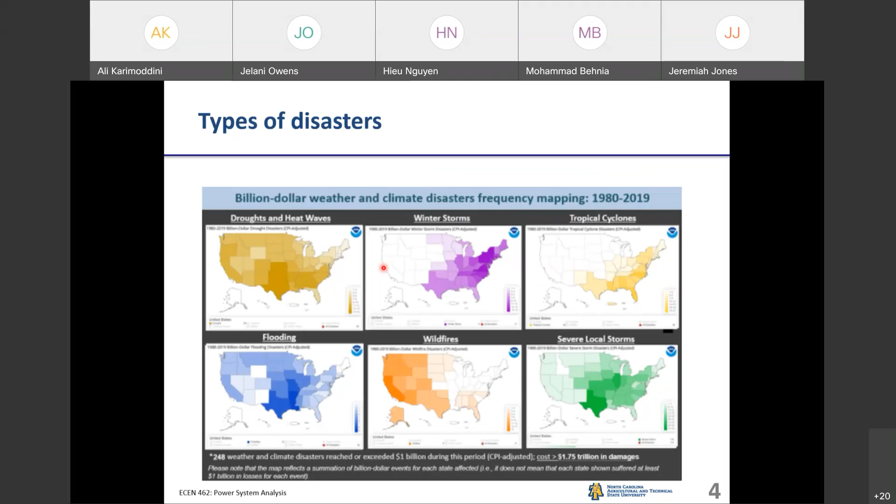The issue is that when a hurricane caused by nature comes, it can blow down our electric poles. So we have to have a different approach, for example, how to build stronger electric poles, how to improve the structure of the overhead distribution system, or just make it underground. And for flooding, unfortunately, it affects underground cables, so how do we make the system resilient to potential flooding? Different disasters result in different strategies. However, they come up with a very common definition.

Then we used the word resilient to explain some type of woods that were able to accommodate a sudden and severe load without breaking. So it came to civil engineering first. Then we improved it, to apply its concept to some kind of material and constructions.

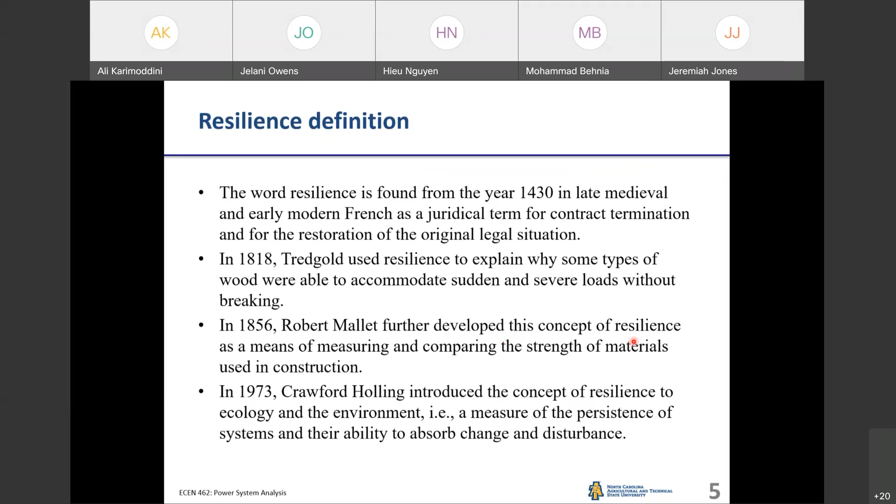And in 1973, Crawford Holling introduced the concept of resilience to ecology and environment. So basically, at that time, we wanted to expand this concept as a persistence of system and the ability to absorb change and disturbance. And lastly, we come up with the term power system. So we adapt the resilience concept to power systems. And the first concept in 1977 was written in the article of Amory Lovins, Resilience in Energy Strategy.

Of course, right now we expand it. For example, not only engineering systems, we also expand it to social systems. So basically, it's the ability to withstand external shock. So for power, in this case, it's a social infrastructure. So basically, coming back to the main theme, the engineering aspect, the National Infrastructure Advisory Council defines the resilience of critical infrastructure.

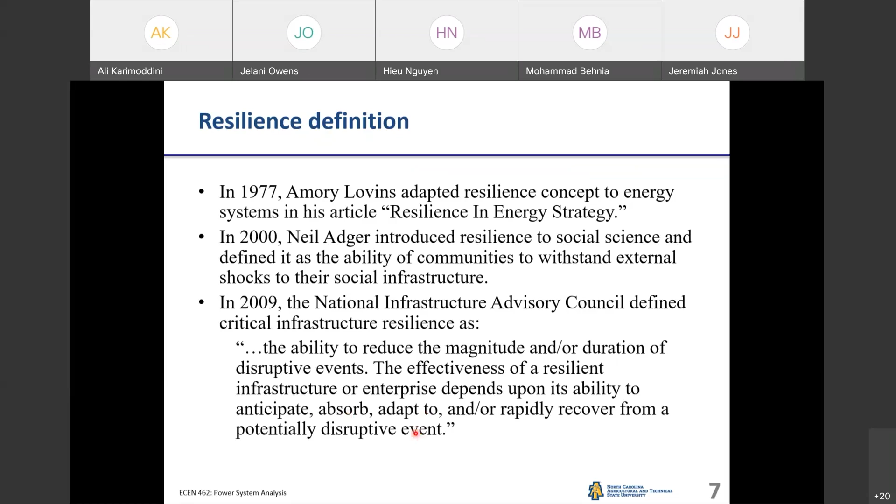It is the ability to reduce the magnitude or duration of disruptive events. And the effectiveness of a resilient infrastructure or enterprise depends upon its ability to anticipate, absorb, adapt to, or rapidly recover from potentially disruptive events. So basically, it takes a long time to have a good definition of resilience. So basically, resilience is the ability to prepare for and adapt to changing conditions and withstand and recover rapidly from disruption.

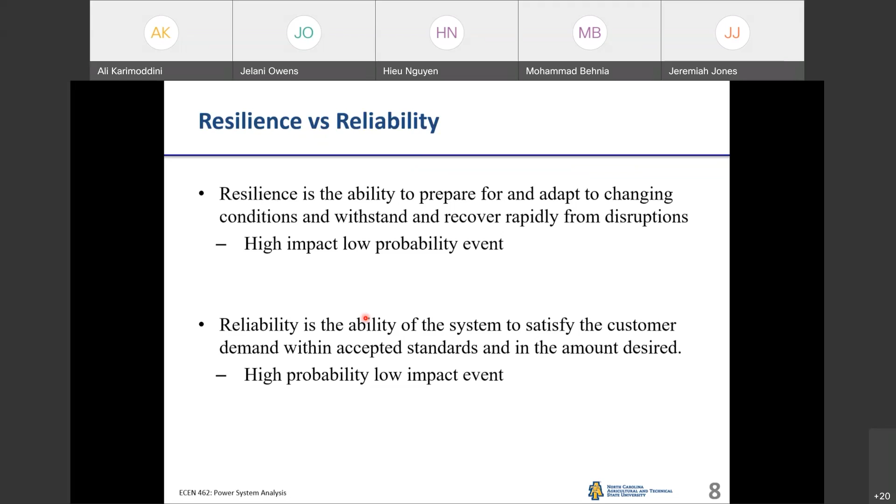So basically, resilience focuses on high impact and low probability events. On the other hand, we have the very traditional concept of reliability. Reliability focuses on high probability but low impact events. So here is a comparison between resilience and reliability. For example, a reliable grid is a grid that can supply electricity to customers without disruption during normal weather events. So it's an example.

So for extreme weather events such as hurricanes, we do not expect that we can serve 100% of customers, but we want to make sure that we can serve as many customers as possible. Also, once the hurricane finishes, we want to restore the power system as much as possible. So that is the difference between resilience and reliability, and also the metric to quantify the system accordingly.

So why do we need a resilience concept for power systems, and why has power system resilience become a very hot topic these days? So basically, we know that the power system is very vulnerable to natural disasters. If the wind becomes so strong, it can blow down or damage the overhead power lines. And in the context of North Carolina, I believe that hurricanes, wind storms and winter storms are the most dangerous factors. So you can see that in the picture.

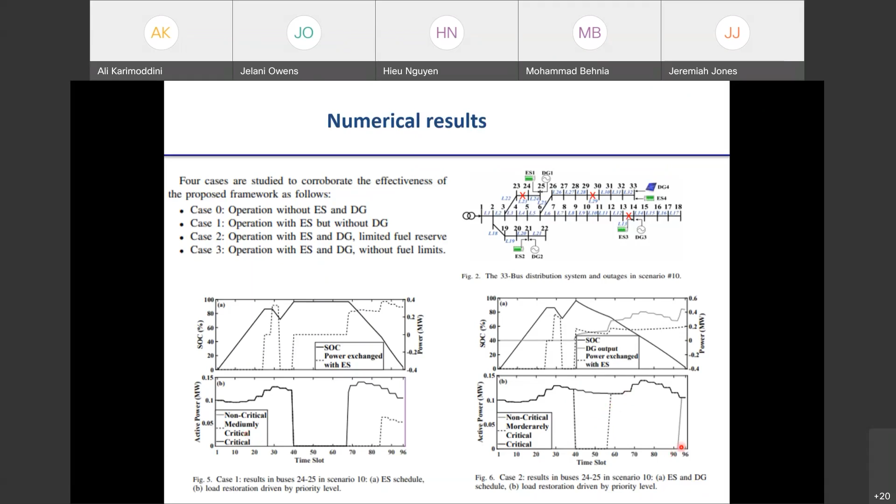When we have more resources with DG, we see that we can serve critical loads the whole time. We also can serve moderately critical load at some point, and non-critical load nearly at the end of the time slot. I visualize it in terms of a resilience curve over here.

So basically, when we have no resources, there is no resilience, so we cannot serve them during the post-hurricane outage. You see that it's reduced over here. When we have more resources, we can serve more customers. You see that it goes up over here. And when we have unlimited resources, we still have some limitation here, because there are some parts of the load we do not have any resources to support due to some disconnection, like an isolated area.

But the point I would like to say is that all the customers here at some point will be restored based on their CIC value. And why do we want to mention that? Because in reality, the critical issue right now is how to fairly allocate energy to serve customers in the post-outage. And actually, there's a recent case in New York. People realized that a certain area was not given enough priority in the load restoration.

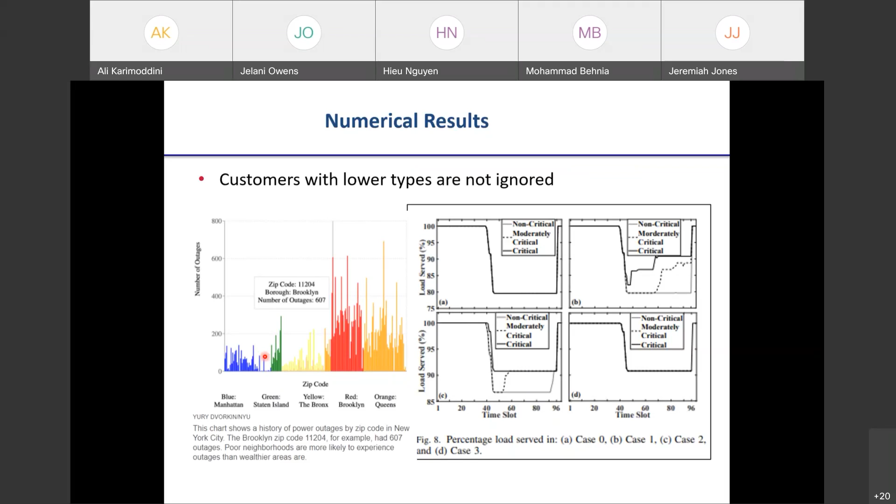So how to put some metric into the system to improve the equity of the restoration is a critical issue. In our work, we use a very simple CIC, increasing over time. It shows that it's better than a fixed value. If we just give a fixed value of the CIC, people just restore the ones that have the largest interruption cost. So they only focus on restoring the critical customers. They will ignore the non-critical ones.

Here with the CIC, when the outage duration increases, at some point we have to pay attention to them. So that is the idea of integrating the CIC into this framework. Of course, putting it into the optimization is very challenging, because the CIC depends on the outage duration, and the outage duration depends on our action to restore the load. So it's not really a parameter anymore. It depends on our variables. So it makes the optimization problem more complicated. Yeah.

So that's it. How much time is left? I still have some slides. I think you still have about 10 minutes. 10 minutes. Okay.

So next, I just want to talk a little bit about some of the current work that we focus on: how to use more active demand-side management of our customers, which potentially can help boost the resilience of the distribution grid. Remember that the previous work focused on utility-based resources like large energy storage and distributed generators. All are controlled by the utility, so the utility can optimize the operation in a centralized way.

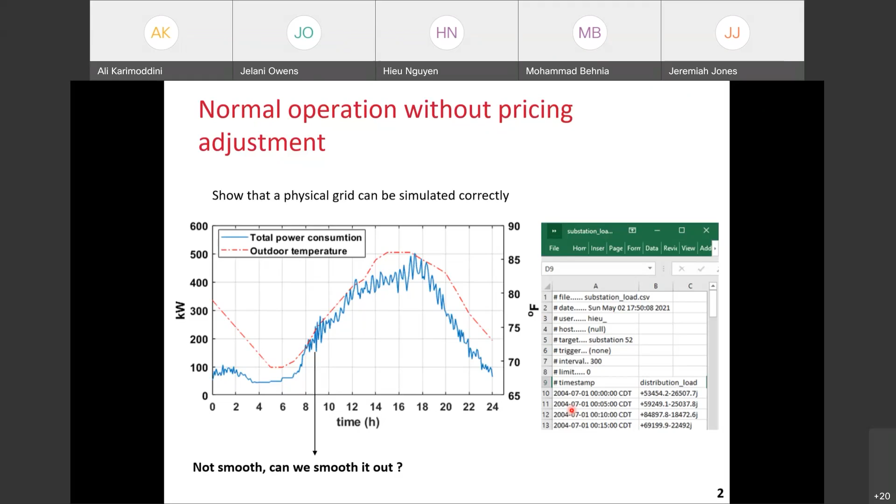However, right now if we have more smart appliances at the demand side, it implies that if we can manage them efficiently, we can contribute a little bit. We can contribute to the grid resilience. So basically here we see that it's a normal operation of a typical distribution network. We see that without any control, the load is not so smooth.

So recently with a lot of smart controllers at the distribution side, the question is: can we adjust the power consumption of the whole power distribution network accordingly? So basically, here is an example in our current project. If we have the distribution load over here, based on the feedback of distribution load, the question is how we make the power distribution system energy consumption follow some reference. Okay, so it's an example.

And of course, for the sake of publication, we want to put it in a better name or more catchy name. For example, risk-based mechanism design for transactive energy market with massively distributed resources. But the idea behind that is very simple. It's just like a load compensation problem and how to control it on/off accordingly.

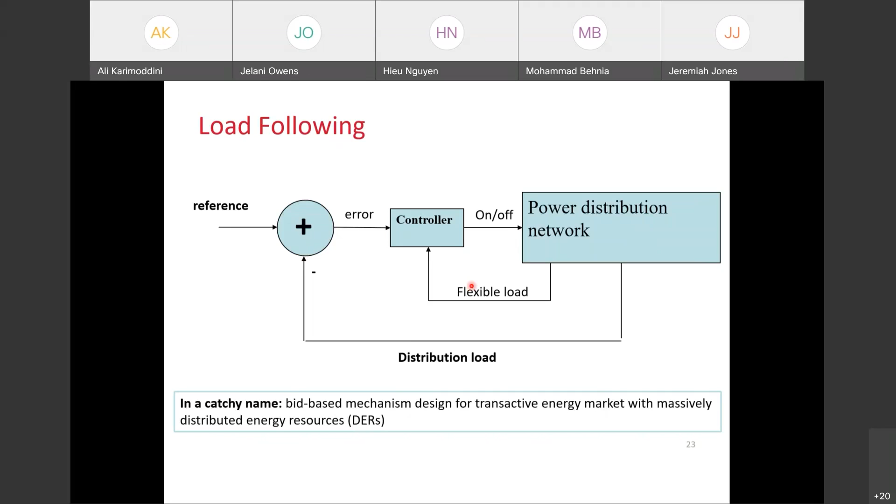Okay, so in this work, we try to implement this thing on a smart distribution network. And we realize this feedback using some co-simulation. And the idea is how to design this control on/off signal via pricing, so we can do that in a distributed way to make the distribution's energy consumption follow some targeted load. I will talk about some implications about power system resilience later.

So how to do that? So basically, we will ask the customer's smart thermostat to report the condition they want to consume power. For example, here we want them to send me a bid: how much dollar they want to pay for a certain amount of energy. And based on that, I know how I can control the appliance on accordingly.

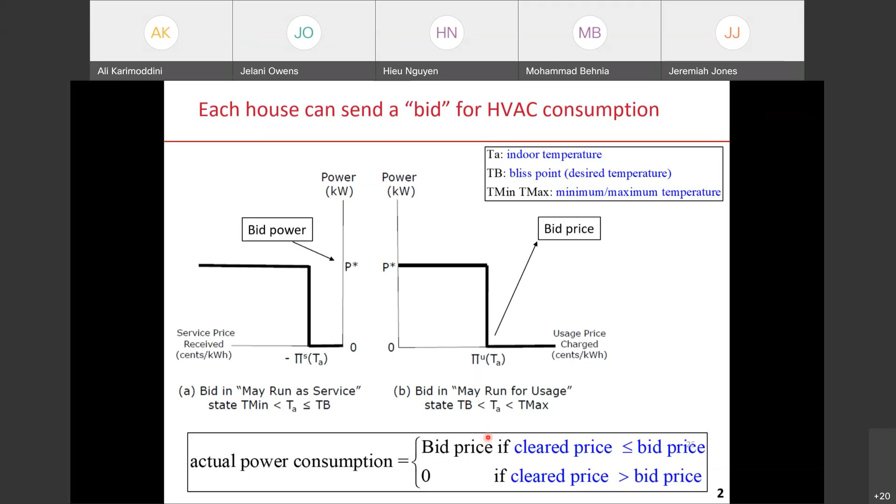So if the price signal I send is larger than the price they bid, they will turn off, because they say that it's more expensive. And if I send the price signal lower than it, I can let them turn on. Okay, so basically, based on this bid, I can design some aggregate control action by pricing.

So basically, from household to household, I just aggregate the bids accordingly, and at the end, I have the price responsive curve. Based on that, I know how I can adjust the power of the whole HVAC. For example, here we have 100 HVACs in the distribution grid.

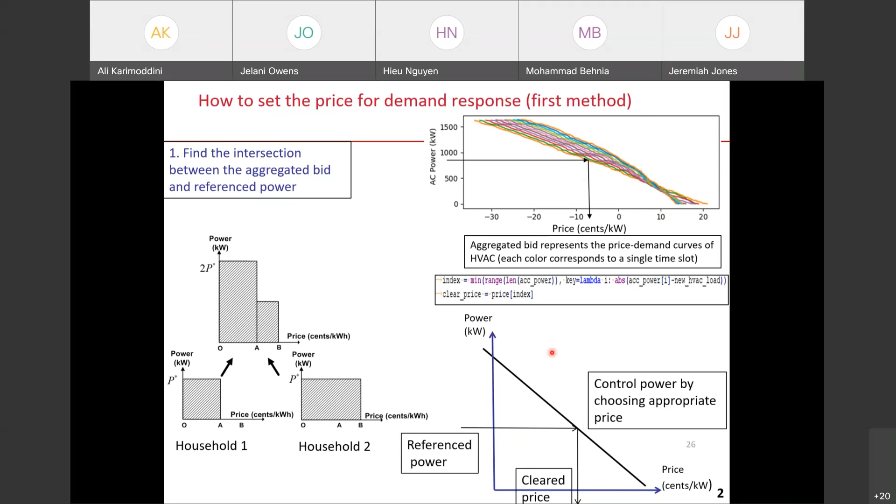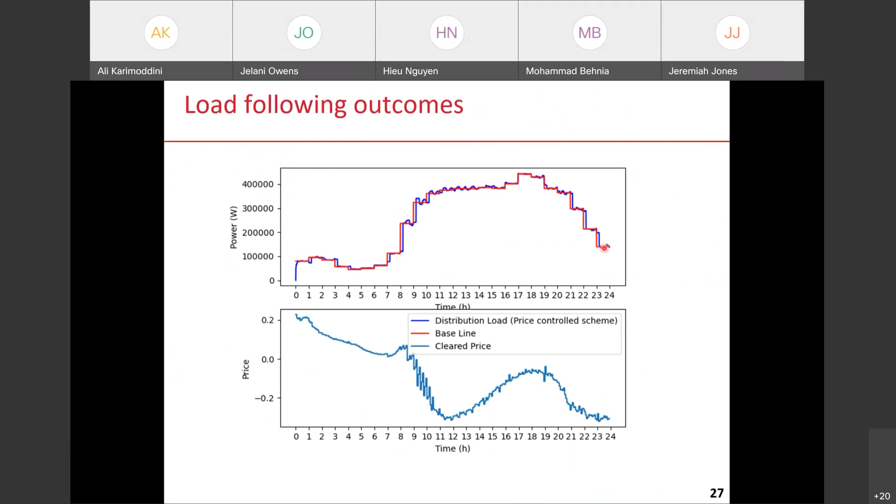So you can imagine it's like a group control, of course, but we implement it in a kind of linear market design. So we control the power of them based on the appropriate price signal, and by sending that, we can adjust their energy consumption quite well to follow some targeted load. So there are some implications about it. Of course, this is a normal operation.

The first thing is that flexible load, such as HVAC and water heaters, can provide something called distributed spatial-temporal flexibility to our grid. It is also a catchy term right now. People talk a lot about it. After the incident in the Texas ice storm, we want the energy customer to be more flexible to adapt to the limited resources. So why is it feasible to use it to address some kind of Texas ice storm?

Currently, I don't have any numerical results and research to highlight that. But the idea behind that is very simple. Addressing extreme weather events in the grid, such as preparation and adaptation, can be done with the active participation of the demand side. This is because it's very difficult for the grid utility to prepare and invest for something very extreme with a very low probability, for example, the incident in Texas.

Some people argue that it's a one-in-30-years event, and it's infeasible to predict such an ice storm 30 years ahead in order to build a redundant power plant accordingly, and also it's very costly. However, given a very good weather forecast in the short term, we know how we should adapt in the short term, given that a certain outage will happen in our area.

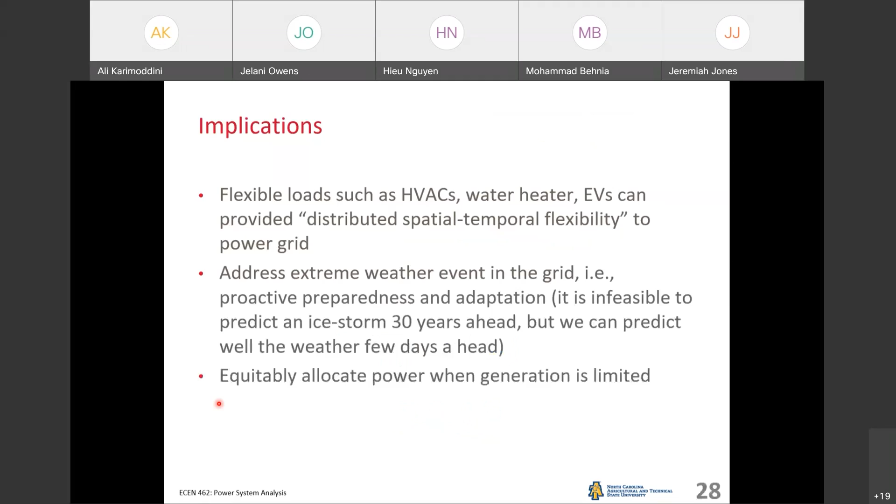I was really impressed by the way that you were trying to distinguish between the definition of reliability and resilience. The two terms have been used interchangeably in the literature, but you were trying to make a distinction between these two. Later, share with me the source, the paper or the document you were referring to, as far as the distinction between reliability and resilience.

Yeah, sure, sure. I will share with you. It's based on, I think, a report of Sandia National Lab to be specific, written by Vugrin in 2017. So I can send you this slide and also this reference after the meeting. Okay, great. Thank you.

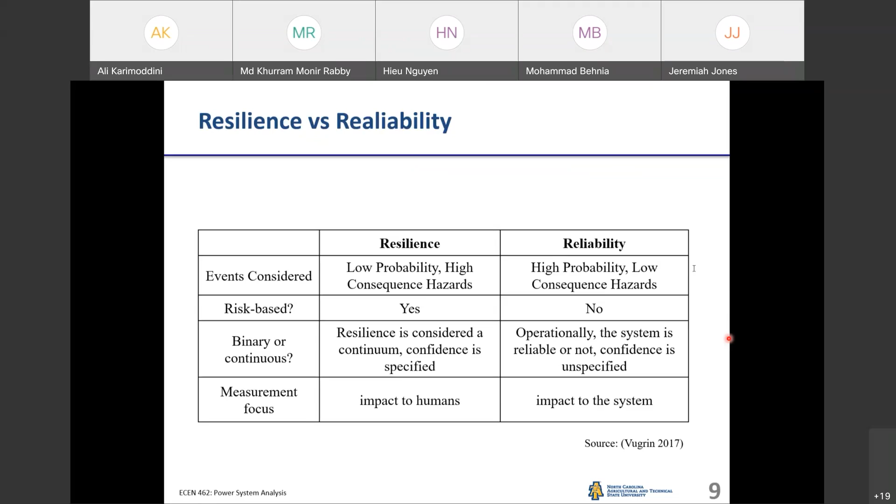My first question is about the system protection that you have assumed during your simulation. The objective of the system protection is to isolate the defective region from the rest of the power system. But in your simulation, I find that when the collapse happens, it drastically falls. So I wanted to know what specific type of system protection you have considered. For example, line differential protection, for the transformer, Buchholz, overload relay, and so on. This is my first question.

Yeah, so you're right. We have different protection schemes. Here we have only focused on the outage of overhead distribution lines. We assume that we have some kind of distribution automation to isolate the outage line. So basically, we consider the fault isolation and localization system. We have different sectionalizing switches. So if the outage happens in a part of the line, we assume that the switch will be opened accordingly to isolate this damaged line from the grid. Based on this information, we have the outage scenario, and the question is how to optimize the resources accordingly.

And for the substation transformer, one issue about the transformer during the hurricane is the flood; the water will hit the transformer and damage it. However, modeling a flood during the hurricane is a very complicated task. So in this one, we assume that the substation is okay during the hurricane. In order to model the outage of the transformer and substation, or the interconnection between the distribution and the transmission, we need to have a good flooding model.

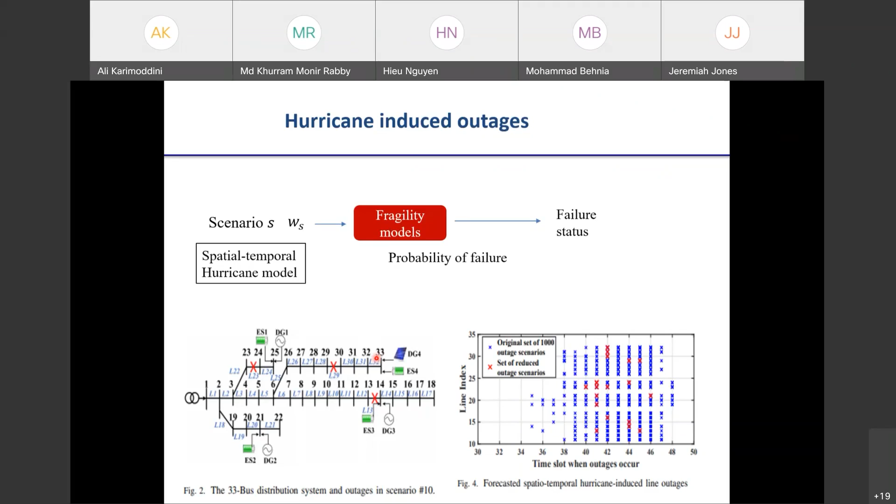In this regard, I have a question about which specific algorithm you follow. Is it Newton-Raphson or the Gauss-Seidel approach to stabilize your system? Okay, so here the thing is the power flow in the distribution network. For solving the power equation, you can use Newton-Raphson or fast forward-backward sweep. But it's difficult to include that in the optimization model.

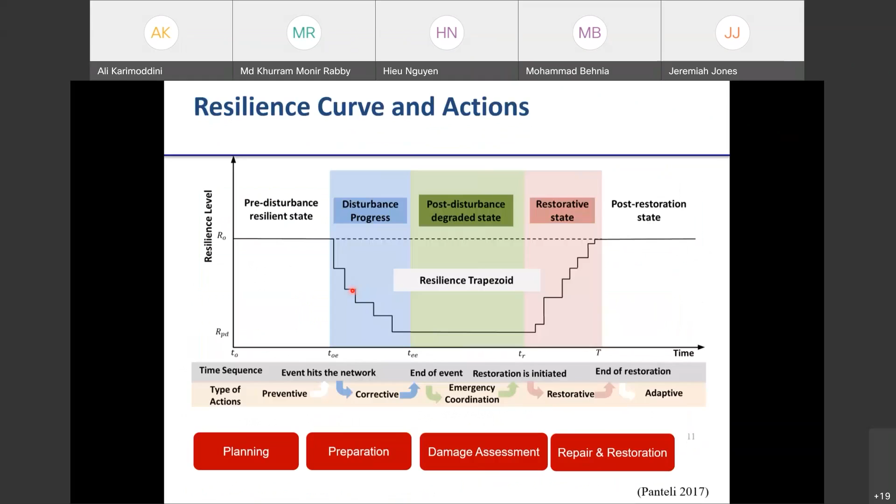So here I got a model that is a mixed integer conic programming. And the thing is that this one is convex. So I relax an equality equation, so it becomes a convex model, and we can solve it using mixed integer conic programming. And the key thing is that in the distribution network with the radial structure, the conic optimization model here is exact to model the distribution power flow.

So that means solving the power distribution equation by Newton-Raphson is equivalent to solving a conic optimization problem. There are some papers for that, and if you search some keyword like conic optimization for radial power flow, you can see some papers. So basically, I try to formulate the problem as a conic programming problem. Okay, so you have numerically solved the problem. Okay, thank you for your response.

And my final question is about the collapse phenomena, because when you try to restore the system, there is a high chance of collapse. It may be either voltage collapse or frequency collapse, or there might be some other types of collapse. So in your proposed system, which specific type of collapse have you tried to solve in your resilient system? Specific collapse, voltage collapse or frequency.

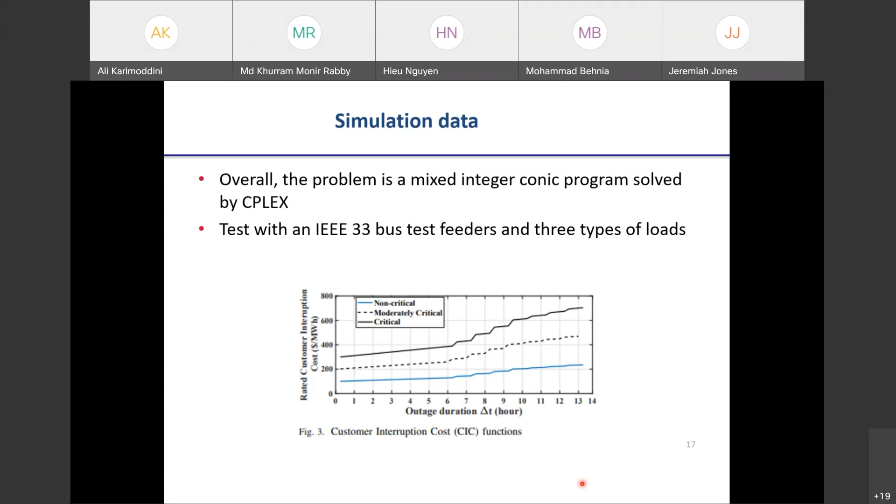Thank you. Any other question? Maybe I have one more question. Especially when we come to the resilience concept, primarily many of these things are either simulation-based or numerical approaches. How about the proof of correctness or guarantee that you can provide? Is it something that you were focusing on or not?

So if I understand your question correctly, most of this is simulation based, and how we validate any application concept in reality. So yeah, this is something I would like to do in the near future, because it is also an issue faced by researchers recently. We propose a lot of optimization and control to improve the resilience of power grids, but industry is very skeptical.

There are two ways to close the gap and verify the effectiveness of this. One is to use a very high fidelity model to quantify our solution concept in the system. For example, in this simulation, because it's an optimization model, I showed it in the steady state, so there is nothing like voltage or frequency dynamics. In reality, to verify something, we have to put it in a power system simulator that can simulate different time scales, so voltage and frequency phenomena or something like volt-VAR control can be incorporated.